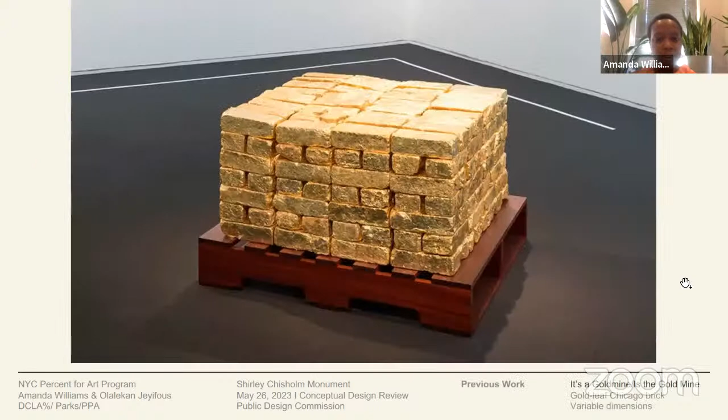I'm going to go through a brief explanation of some of our past works, and then give you a summary of our winning entry, and then give you an update on where we stand with the conceptual review. So this is work I've done in the public sphere as an artist and architect.

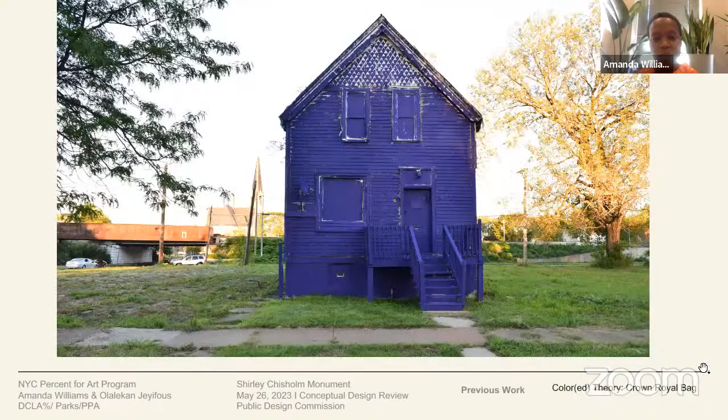I'm originally from Chicago and live here now, and do several works that consider issues of place and placemaking on the South Side. I have a variety of projects that call attention to inequities in the built environment. This is a project called Colored Theory, in which I painted abandoned homes that were slated for demolition to call attention to the history of redlining and other practices that make neighborhood sustainability difficult.

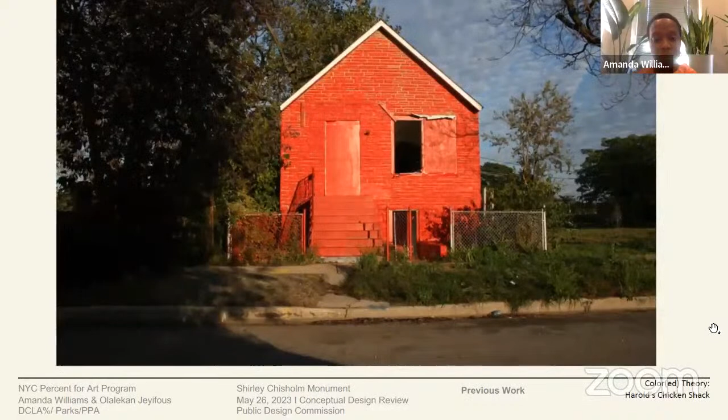This is another example. Also work in St. Louis, Missouri, as part of a project with the Pulitzer Arts Foundation and Washington University called Pixel, where we shrouded a building that was also slated for demolition in gold, and then did a series of public programs that talked about what it means for buildings, both everyday and monumental, to go away in a community, and what it takes to rebuild those communities and make those sites places of viability and civic engagement again.

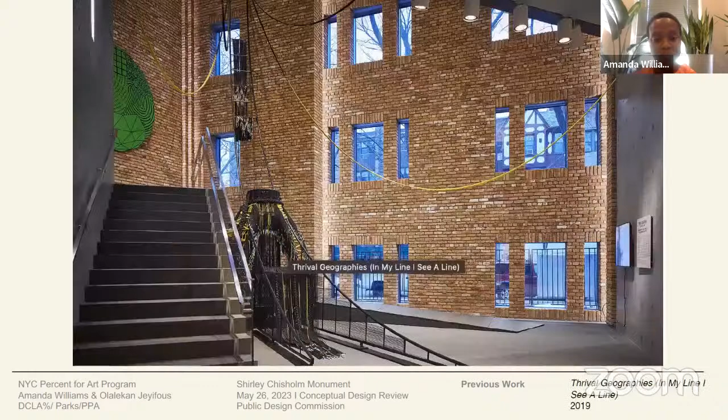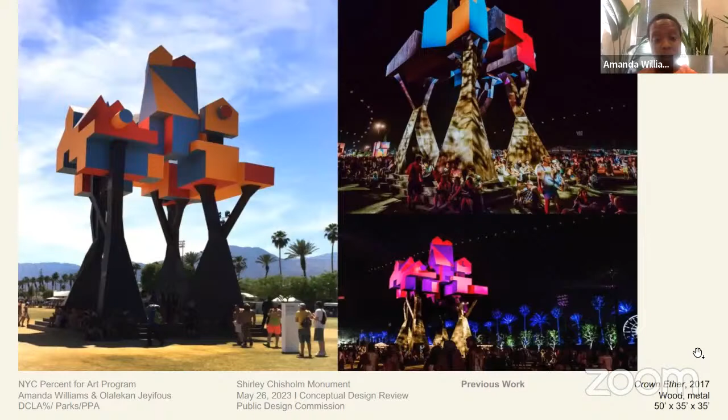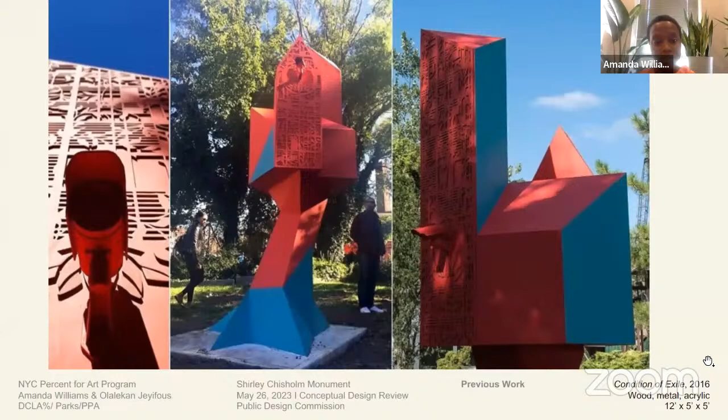This is work by Lekan. Lekan has also done a number of public projects, some temporary and some permanent, around the country. He often brings in conversations of place—this is in Cleveland—and issues both historic and contemporary, and highlights figures that are important to those places.

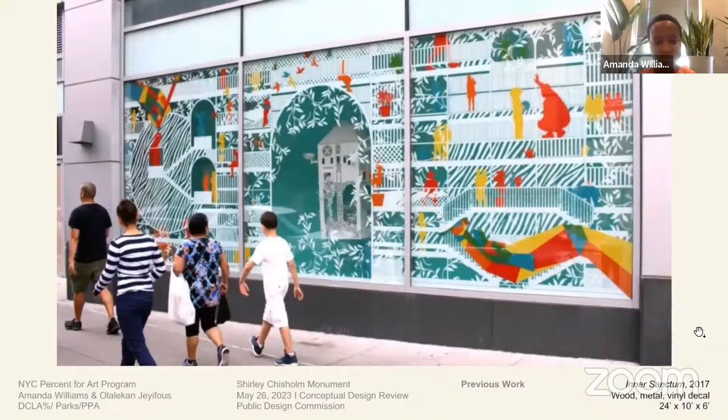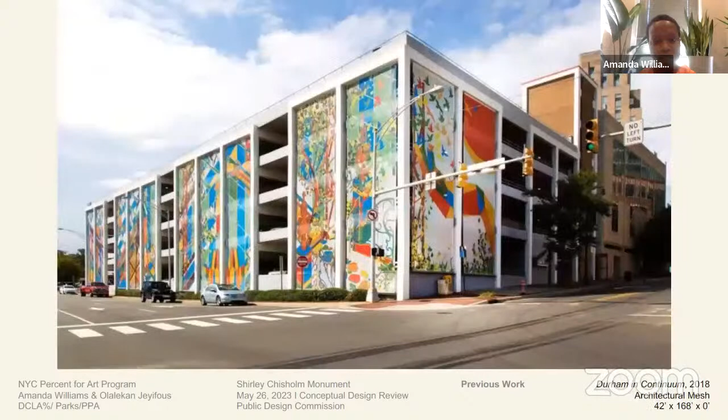We use a variety of materials, both permanent and temporal, depending on the setting and the required performance of the material. This is in North Carolina.

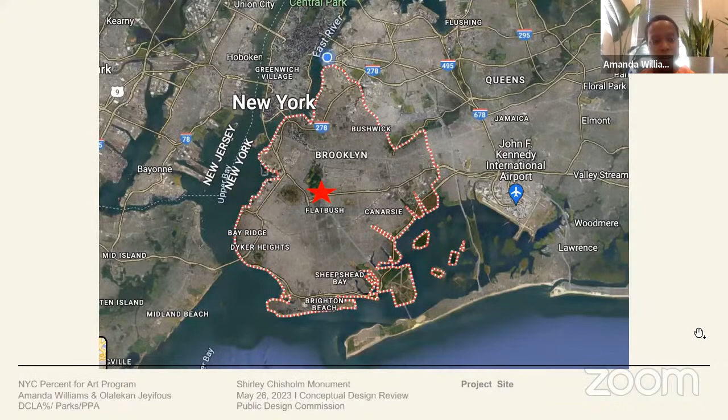For the Shirley Chisholm project, we were part of the She Built New York program, which is looking at five historic figures that played a strong role in shaping New York City. We will be the first of the five, with Shirley Chisholm in Prospect Park on the Ocean and Parkside side of the park entrance.

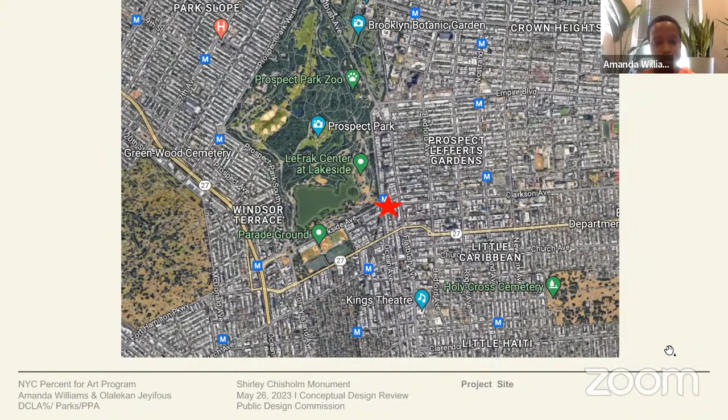We originally submitted this proposal as an invited call and were selected as the winners. Our strategy for the project was to have Shirley Chisholm represented at two scales primarily.

One would be her outsized figure and iconic visage in her signature patterned attire and large afro, and then also her role as the first Black woman in Congress. We combined two of those components together and then intersected them with a third.

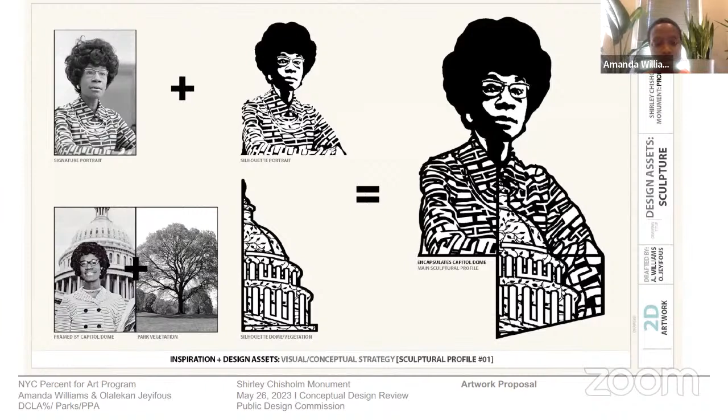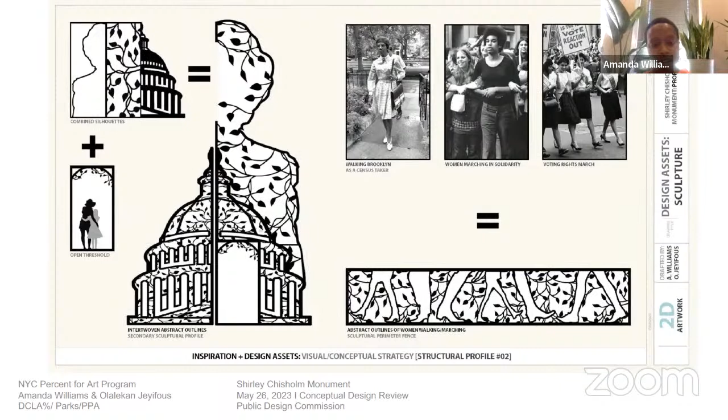That also marked the fact that this site is at the base of the entrance to Prospect Park, and so thinking about English gates and the filigree that might be associated with that.

Our original proposal was to carve out a portion of the ground in the shape of the congressional arc of seats, and to highlight her seat as a way to also invite people to think about engagement with the civic process.

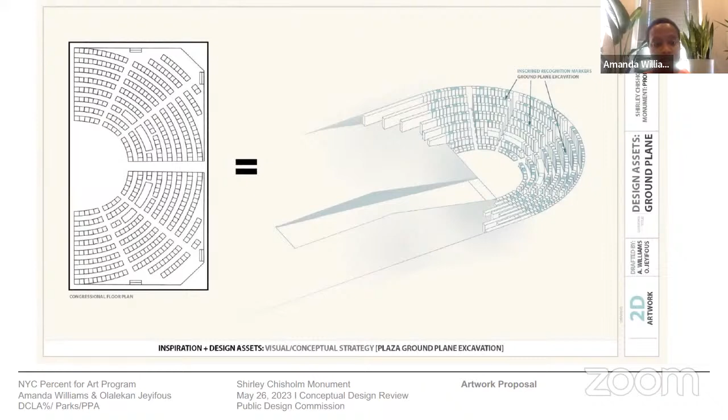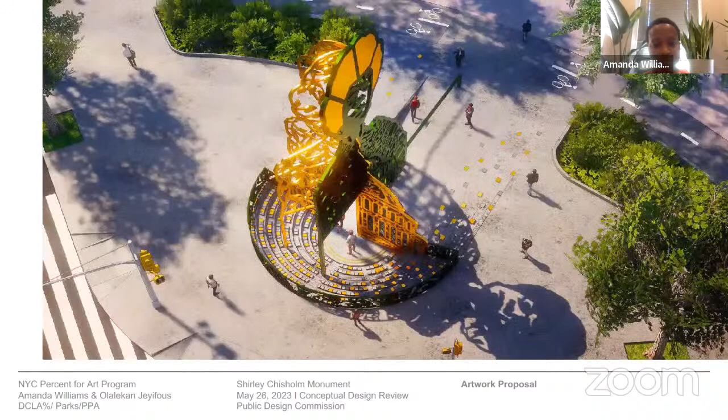The feedback from that was to refine some of that component and really think about what the proper scale was, and to also think about both tripping hazards and climbing hazards that could arise, as well as difficulties presented with maintenance related to sculpting the ground or particular materials we might use that might require enhanced maintenance.

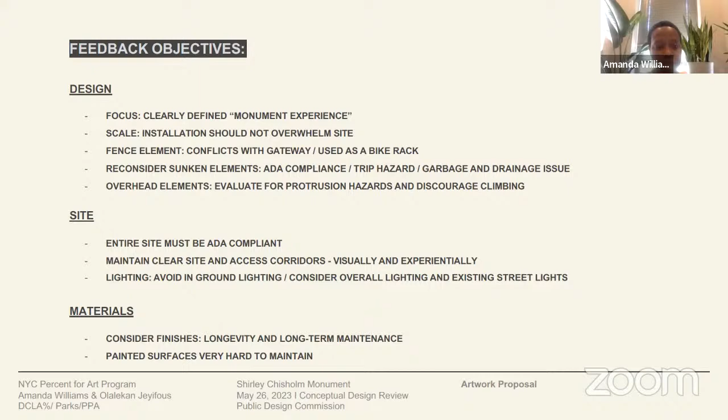In our updated design, we've addressed those items first by reducing the overall height from 40 feet to 32 feet. The trees that lined the site, being redeveloped as part of the larger improvement to the area, exceed that height, so she will sit below that, but still at a large scale.

That's visible from the further lengths of the vista, so that she will be a sort of beacon from a distance. As you move closer, we've emphasized the Capitol building shape and also increased the heights of the openings that serve as pass-throughs from the sculpture into the park, so that it makes it more difficult to jump and grab onto.

We're also providing mesh for the portions of the filigree that could get little hands or arms caught, or that people trying to wedge feet to climb the sculpture, to make that process more difficult.

We also removed the sculpting of the ground and the railing that would have to accompany that to make it flat, but changed the texture or pattern of that inscribed congressional seating, so that it's still represented but creates no ADA hazards.

We've also been thoroughly exploring materials that have a natural finish that will patina or can be patinaed, so that painting—which likely could result in wear or scrapes or the need to repaint frequently—is minimized.

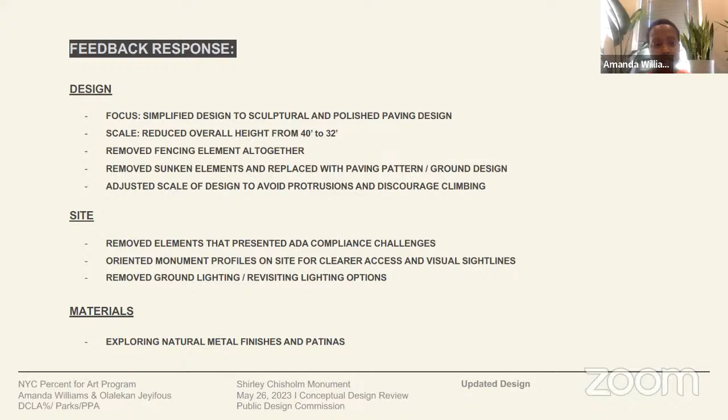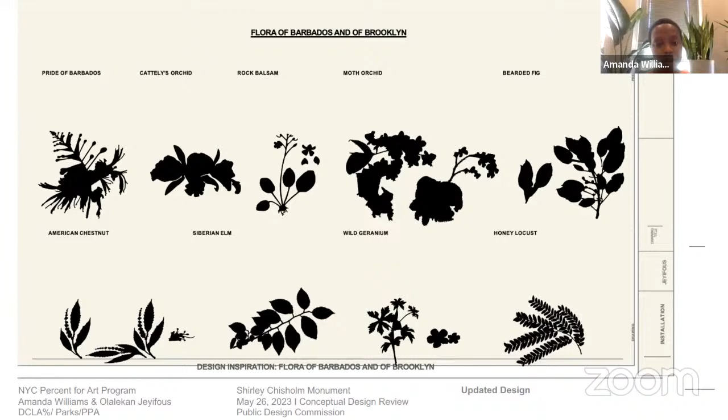We also explored the flora and fauna of Barbados, which is Shirley Chisholm's native home, and then also those of Brooklyn, which was also her home, so that the filigree for the portion facing the entrance to the park will be a mix and a celebration of both of these.

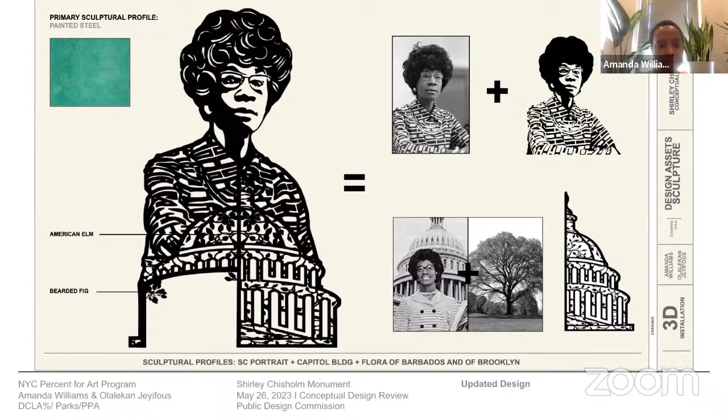We also thought in depth about the color history of the greens and some of the blues that can represent the patinas found in other public structures in and around Brooklyn, but then also things that will weather and wear evenly, allowing a kind of colorful beauty without necessarily needing to paint.

There'll also be some integration of bronze, both in the profile along the edge of the silhouette, and then also looking to think through some of the inscription of words on the ground, either as inscribed stone or potential inlay of bronze in strategic locations.

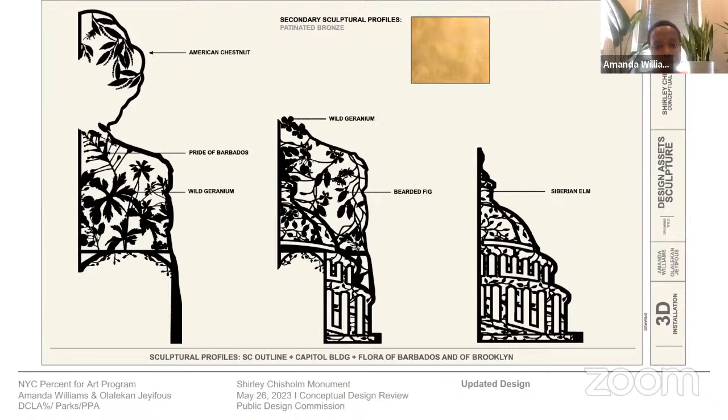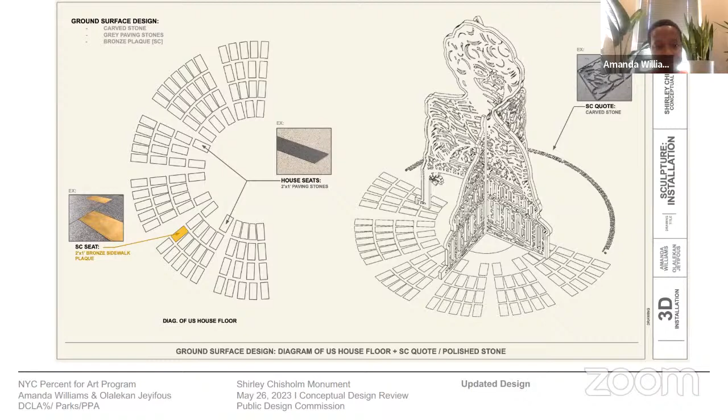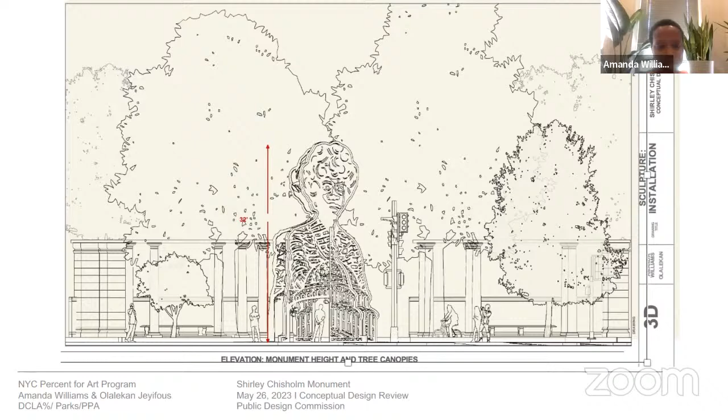And there you can see it in elevation in relationship to the other elements.

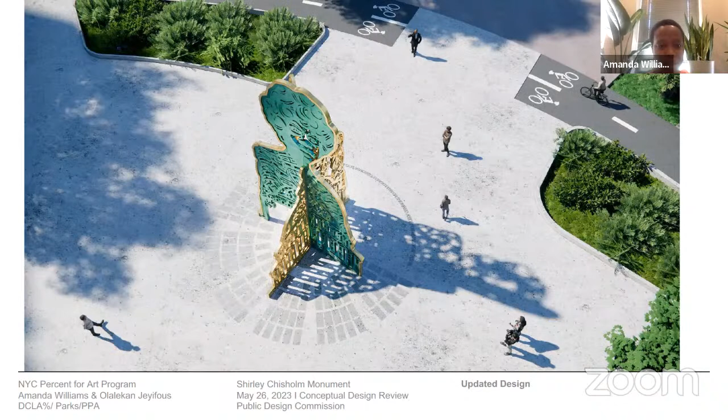And then here's some renderings that would describe what I was explaining about the inscription into the ground, and then also that bronze silhouette that will highlight the three intersections.

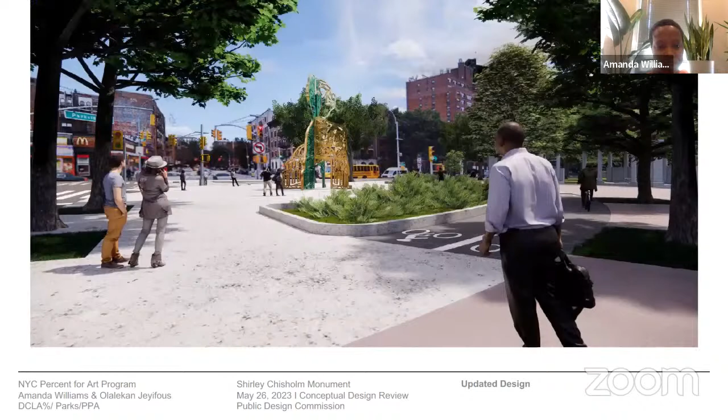I think there's one more, two more, three more, and finally the night shot. So with that, I'm happy to take questions or clarify anything that I might have spoken over too quickly.

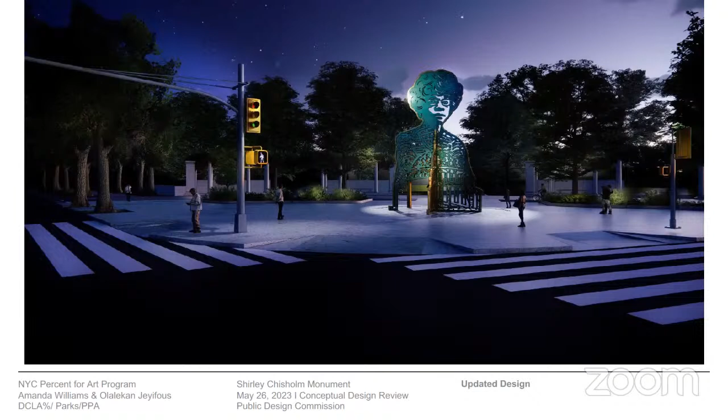Hi, I've emailed written testimony to the Design Commission email address, but I'll give a summary. I'm a resident of Prospect Lefferts Gardens, and I frequently use this park entrance as well as all of Prospect Park. Really, it's our backyard. I wanted to encourage the commission and the artists to consider an element that maybe you usually take as given, and that's place. As the artist said, this is very much about placemaking, and I think it's an integral element of the design.

I do really like the idea of combining the likeness of Shirley Chisholm with the congressional seats in a base around her to emphasize her role as a trailblazing Black female politician. However, this is an extremely busy entrance, especially in the summertime. I have seen literal stampedes at this entrance, I don't know why, but I've seen them. And this work is placed directly in front of the entrance, so it looks like it might restrict pedestrian circulation.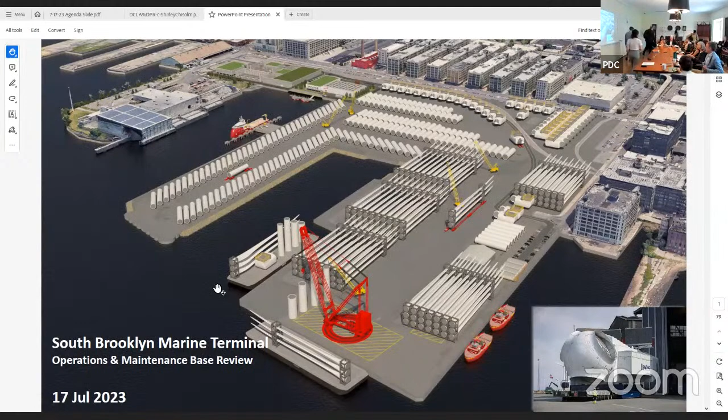And we will now begin the committee meeting with the preliminary review of the construction of an offshore wind operations and maintenance building and adjacent site work at the South Brooklyn Marine Terminal. We will not hear public testimony or vote on this project today, but presenters, as you arrive, you may begin when ready.

Gail Rothstein: On behalf of the EDC, I'd like to thank you and staff for all of the reviews and time spent, and the site visit that have brought us to this successful design. Our presenters today are from Equinor, a brief statement from Calvin O'Brien, and then from Jacobs, Al Consoli and Jade Paul will present. Thanks.

Good afternoon, Calvin O'Brien, project engineer for the delivery of the South Brooklyn Marine Terminal. I know folks have seen our presentations in different forums. Did just want to frame what we're here to talk about today, which is the operations and maintenance base for the Empire Wind and Beacon Wind project located in the northwest corner of SBMT.

So Al and the team have worked quite a bit over the last 10 or so months to develop the design, with feedback from this committee and the community. We hope that the items to the aesthetics that he's done do meet the goals of the overall project. We've done a number of other programmatic things that hopefully you saw in our letter to try to address other concerns from the community, a learning center overlooking the site, giving the community a chance to see the site and even have tours of the facility to help address some of the concerns of access to the waterway.

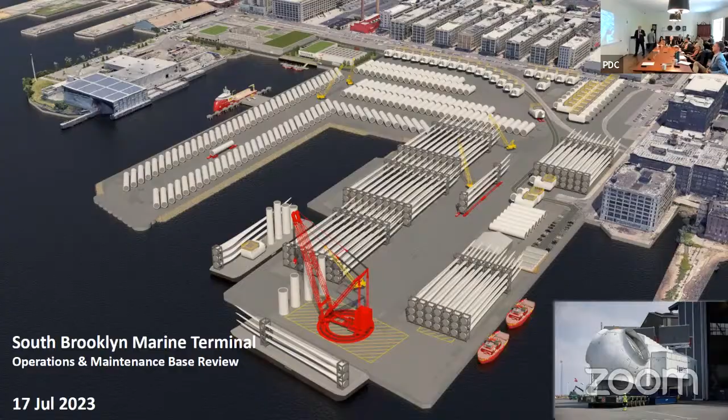Since we've been here, we've done an extensive redesign of the building, and what you saw back in December now looks completely different. The form is still the same, but we've incorporated a new concept based on feedback from both the community and your commission, to tie this into the whole reason why this project is here, which is wind, to help bring wind energy to New York City, incorporating that into the building so it ties directly into the context of what the entire program is about. We've incorporated a new sail design, what we call a wind sail, which picks up on the turbines that will be part of the wind farm.

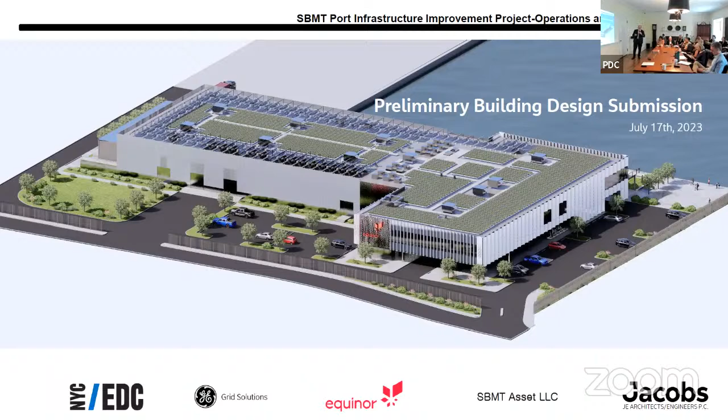So that's the primary reason for these fins that you'll see in the new elevations as I go forward. We've also added a new feature, which is this element here, a kinetic wall. That kinetic wall will now move with the wind, and it won't vibrate very much, but it will show a reflectant change in light as it is hit with the different wind in that area. So we're very comfortable with how this now looks, and we hope that you're satisfied with our new design.

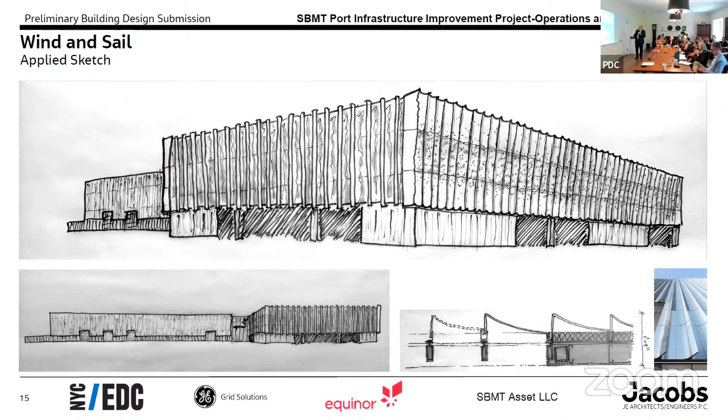Just to give you an idea, when we met with the commission previously, we showed a number of different sketches. So this is what it started off with conceptually, and this is now what the wind sail will look like. We've taken that a little bit further throughout the building, and we've incorporated a polycarbonate panel along the southern end of the building on the east side.

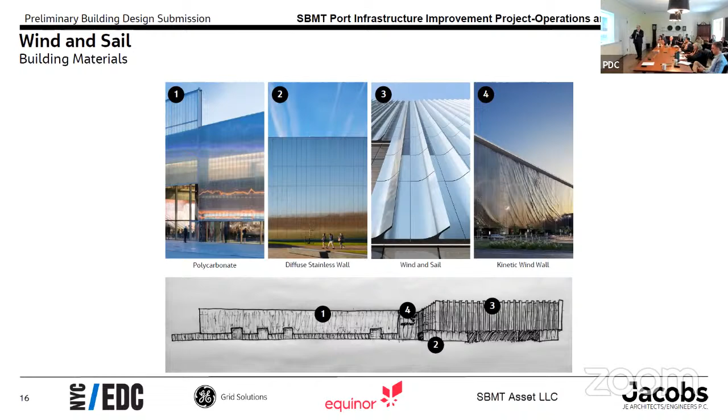This is now the primary office area where we have the sail going around the building. We've incorporated a stainless steel panel at the base and along this node here, which helps us in the transition between the two sides. We've also now developed a kinetic wall from this original sketch in this corner up the front, and that helps us define the entrance.

I just want to advance to this elevation here. This is now what these will look like. So these are the fins that'll come out from the building wall, from the curtain wall itself, and they'll be perforated. The reason for that is we're going to now have a continuous band of curtain wall along the wall itself.

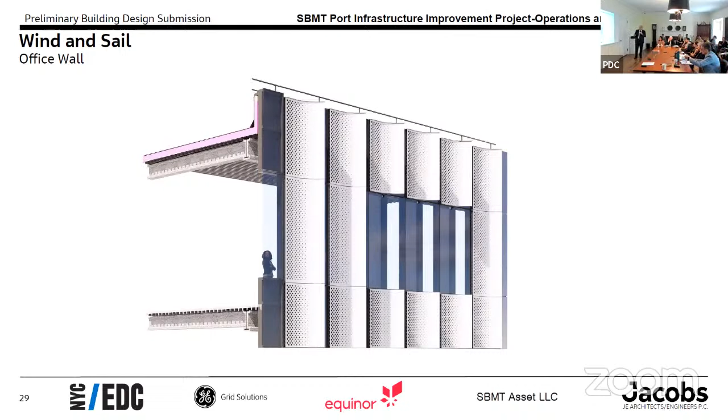That'll allow us the opportunity to place glazing across the entire perimeter, and you'll be able to see through these panels. Then where we have breaks, you'll be able to see directly out where you won't have a panel in front of you. This is the rhythm on the north elevation now that we've created.

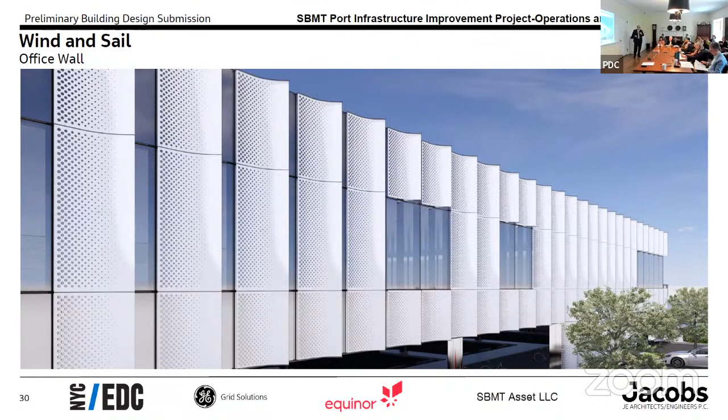So this gives an idea as to how these modules would work. Between the two bands, we're looking at about a 6-foot panel, but the entire wall now will be a curtain wall, where previously we were looking at a rain screen design.

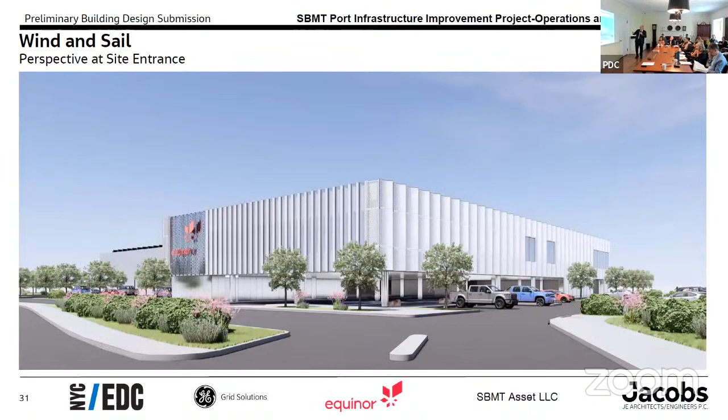The use of the perforated panels, again, allows us to see through them and to have the gaps inside so we can have clear vision directly out. This illustration gives us probably one of the best examples of how that will look with regard to the windows and how that treatment will be taken care of.

This also was an ideal location for the kinetic wall because that's where our entrance volume is. So we were able to incorporate that into an area where otherwise we would have a blank wall, and we didn't want to have that. So this became a natural location for this.

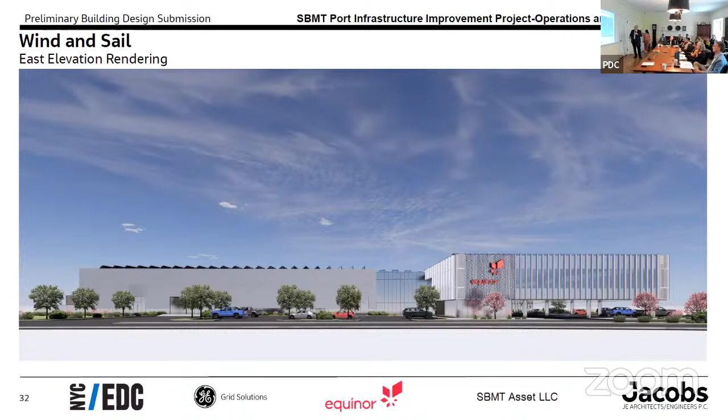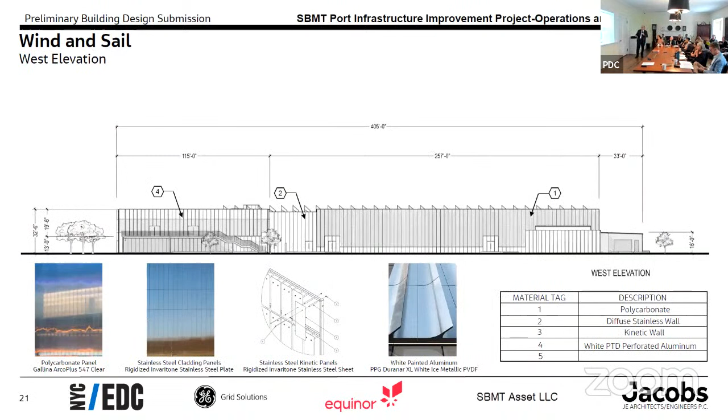By incorporating the stainless steel here, this allowed us now to create a node between the two halves. The polycarbonate panel, we broke down a little bit as we look at the building elevation along the front. I want to go back a bit to these nodes here. What we did is incorporate penetrations within the polycarbonate panel to help accentuate the entrance doors.

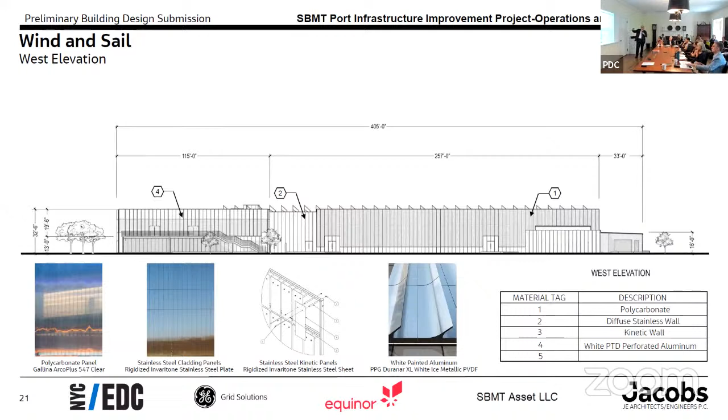We're going to have entrance and exits at each of these positions. So we've changed the panel and not have it go completely down across the entire length, but we've now highlighted where we have the doors, and we'll continue a stainless steel base up and through this area.

So this is our view from the waterfront, and this is our outdoor patio deck that'll be elevated. We have an employee area that Jade's going to talk about in a few minutes.

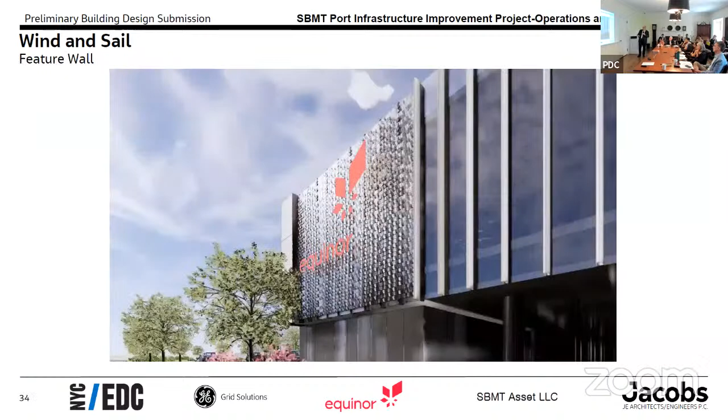And this is where we have the elevated substation that's going to provide power for the overall building. A detail of what the kinetic wall will look like.

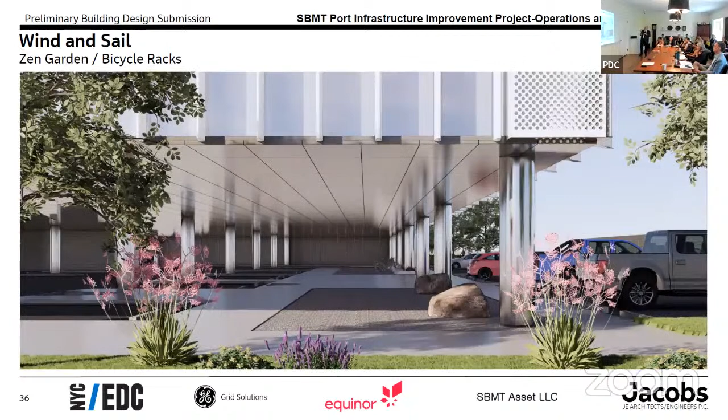And this is now the open view underneath where the building will meet grade. The office volume is above, and this is now completely open, where before we had it broken down with a couple of enclosures, which we've now relocated. And this is what our proposed entrance is going to look like as well.

So as you can see, the Equinor logo is shown here, but again, this is just a placeholder. We're going to go through a whole signage package with the client and then show that to you when we have that ready.

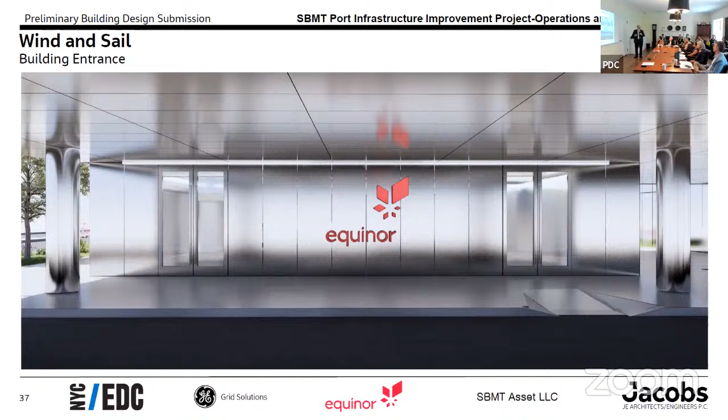So if there are no questions, I'm going to pass this over to my colleague Jade, who will talk about the landscape architecture. Just so you can see here, these are the additional penetrations that we made within the panel. At each door position within the polycarbonate, we've now accentuated that. And we've added the stainless steel base, and extended it all the way up.

Thank you, Al. So basically, since the last time we've met, we've been able to advance the design of the landscape further. I think we're still trying to maintain the spirit of the plant palette being plant assemblages rather than looking at individual plant species and how they appear together, but rather how they perform together.

Further in the package, there is a full plant list if you are interested in the plant species that we've incorporated. We are still incorporating a green roof. We're obviously very limited, trying to balance the ecological function and the function of the site.

So there's working in as much natural area around the parking as possible. We've incorporated a natural salt meadow over here. And then, as Al mentioned, we have an employee amenity over here.

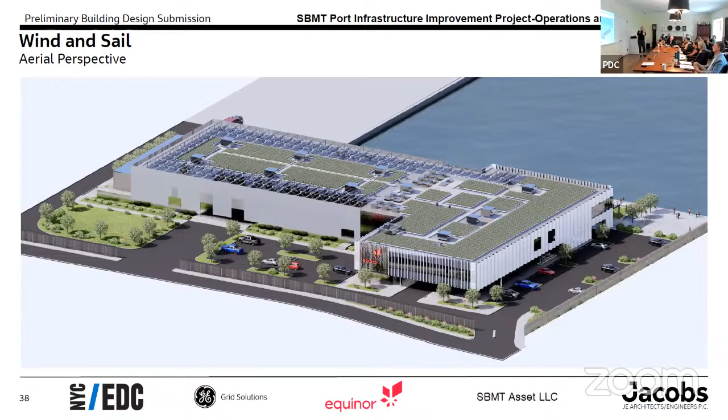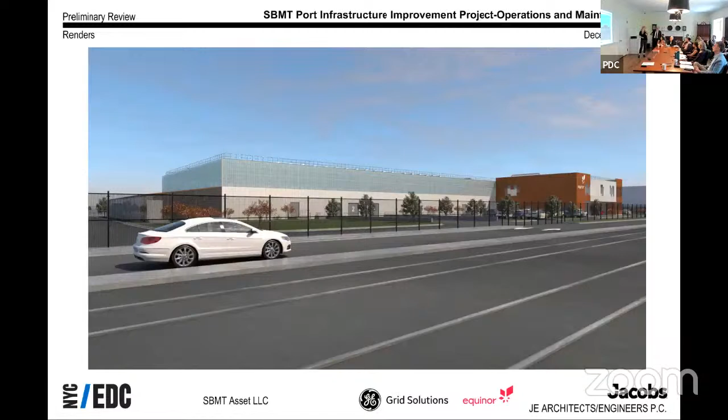Let me advance. Those are the original renderings of the previous design that was presented to you back in December. We included those so that you can see how the design has advanced.

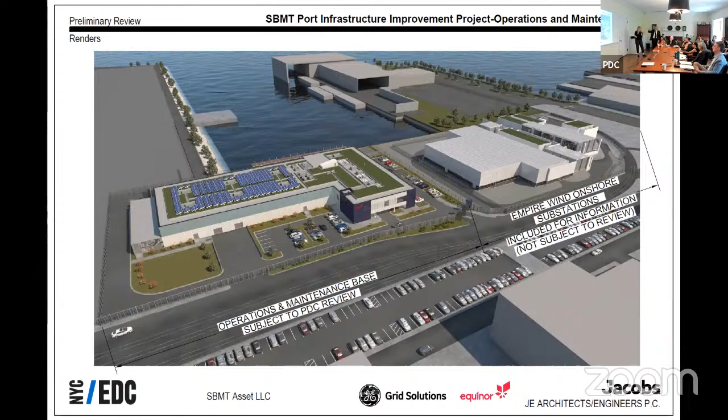And if you go to the next two slides, these are the slides that we presented in our April package that we looked at, and that led us to now where we've completely taken a different approach, what you see in the design of the building today.

We are incorporating solar panels over the warehouse side of the building. We're incorporating the south meadow here, landscape, vegetated areas as much as possible. We do have this DEP easement that runs on the north side of the building.

North is up to the right. And then, as Al mentioned, we have this employee amenity area here for the employees and the visitors to the site.

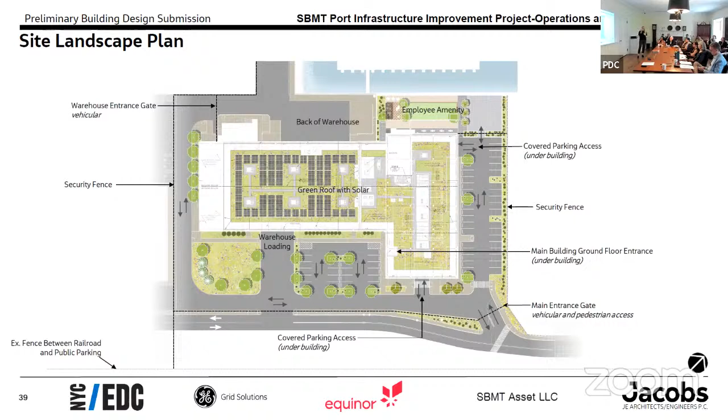Also with snow management in the winter months, in the parking areas, we're obviously going to have to deal with that. So the plant palette responds to this environment of being on the waterfront. It's a little bit more harsh.

There's a lot more sun, wind. We looked at solar angle, we looked at prevailing winds, and really tried to build the plant palette to be very responsive to these site-specific areas.

One thing that I do want to note is that on the entrance of the site, we are still working on the sign package. So as soon as that is figured out, we'll be able to tie the signage with the landscape and that entry feature as well.

So the employee amenity area will go into greater detail. So this is the area that I mentioned before. This is for the employees, the visitors.

We looked at how they would be utilizing the site, predominantly small gatherings, outdoor dining during the lunch hours. And this would also be programmed up to larger events that Equinor might hold throughout the year.

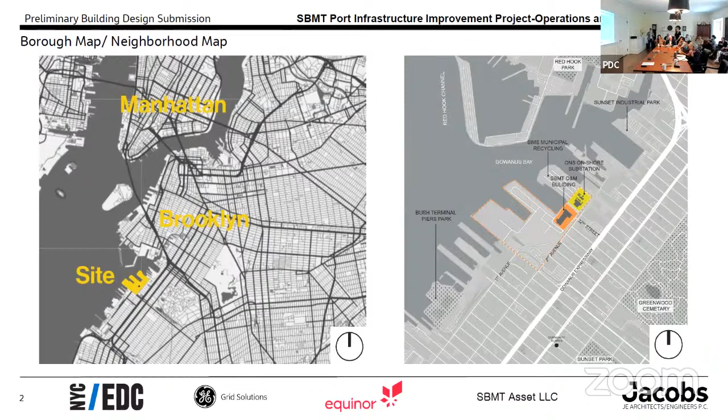So these are just going to be on the plan. They're planters, as opposed to being integrated walls built into and integrated. How tall are those planters?

I think they're 4 feet. The reason I'm asking is because on the section, the planters look rather large, and in a way they start creating a separation of spaces between the lawn area and the multi-use area. If that's the intent, I think that's fine, but I'm wondering if there's an opportunity to make that into a more robust design intention.

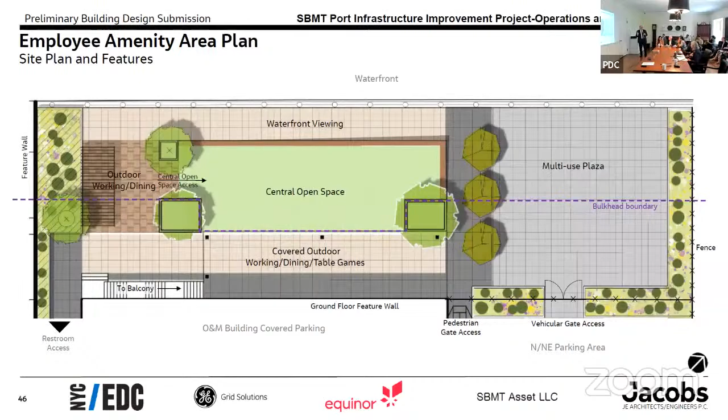So I had a question, kind of a detail, maybe we'll see more about this - it's the stainless steel and the finish of the stainless steel. I'm just concerned if it's polished, because it's going to look polished in the rendering. No, I understand that you would have that concern, but no, it won't be polished in that respect. Okay, let me see if we have it - the base and the columns.

So in those columns too, where you're wrapping the columns, is that the same material? Yes. Okay, I don't know if we get to see a sample of it, or if that ship has sailed, but I'd love to see what it looks like.

And then I also had a question about the shade structure and who the architect designer is of that, because it looked very simple and elegant. It doesn't have to look like the building, I just want to know what it is and what the intention of that is. It looks like it's TBD, right?

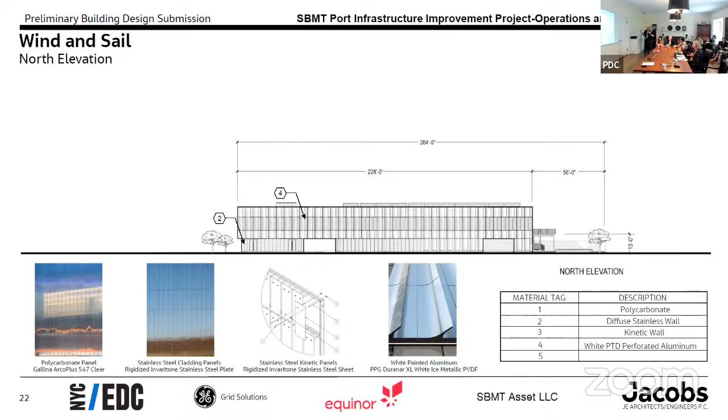We're going to see it from the waterfront, so I'm thinking about the public that I'm representing. We're still looking at color, still looking at what this is going to look like. I'm talking with the architecture team on how to marry the two together, trying to marry the colors we're using. Now that the building has changed, we're looking at marrying the colors of everything, and this is also changing the site furniture we're using. We're all working through this now, and as soon as we nail that down, we'll present it. We'll just look forward to seeing that design in section.

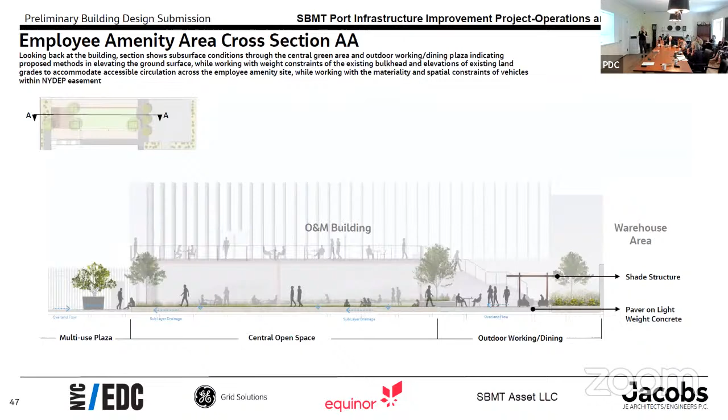The other question I had was about the section going east-west. At the entry, I know you've got everything raised up because of the flood. So that area where you're showing the stainless steel, is that a floodable area? I'm just curious.

We're intending to use dry flood proofing devices everywhere. So all the doors, for example, will have the ability for flood proofing, except for the 2 entrance doors. There we'll be using stop logs that'll be placed into pockets located within the slab.

At that location we're still within the flood zone, so to speak, so we do have to protect it, and that's the best way to do that at those positions. Everywhere else, though, everywhere there's a man door, those doors are actually flood doors. They'll be stainless steel finish, and they're designed so you don't have to provide a second apparatus in front of it. It'll actually seal and protect the door.

And the same thing with the roll-up doors, they're actually flood doors too. I see, okay, so that was the whole reason for being engaged that way. And those will also be stainless steel finish as well.

Okay, great, thank you. Because the site floods so much, does the parking lot landscaping include any bioretention ponds, swales, any type of passive way to handle the flood? We talked about that very early in the project, but the way the stormwater has been permitted, we're only managing what falls on it, essentially. You mean you're taking it all to the storm sewer? Is there any way, since the SBMT parking lot is quite large, that you could incorporate some sort of passive bioretention method?